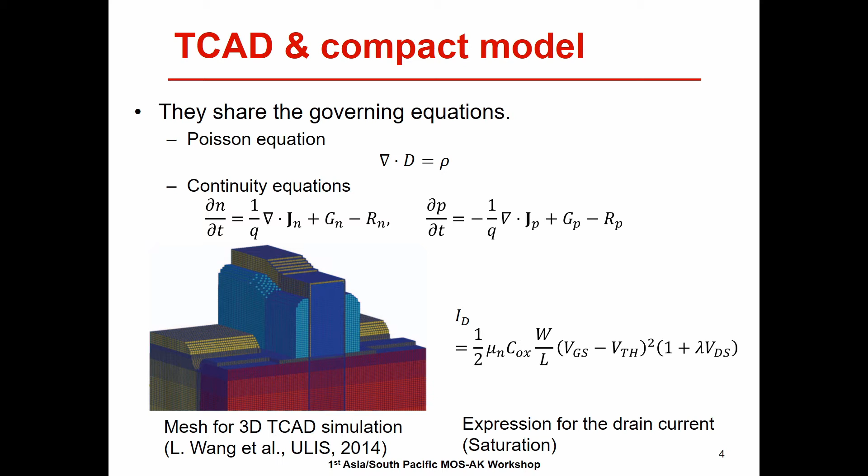Introduction. As we know, the TCAD simulation and the compact model share the governing equations. Those governing equations include the Poisson equation for the electrostatic potential and the continuity equations for the electron and hole densities. In the TCAD simulation, we introduce a mesh to describe the semiconductor device, and the discretized differential equations are solved at those mesh points. On the other hand, in the compact model, we build analytic or semi-analytic equations to describe the terminal characteristics.

It is my ultimate goal to provide a seamless transition from the TCAD simulation to compact models, at least in some sense. In the industry, there are many application engineers to calibrate their TCAD model devices to the fabricated ones. The calibration is very time consuming, and finally we have a well-calibrated TCAD model. However, the compact models are not much compatible with the TCAD simulation, and we need an additional step called parameter extraction to build a well-calibrated compact model. When we have a compact model similar to the TCAD, this step can be simplified.

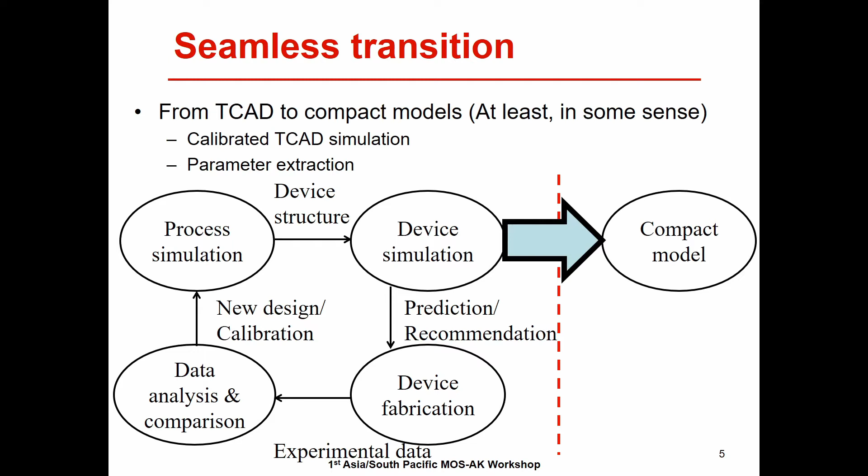Then, which are the major obstacles to achieve this goal? In my opinion, the most important one is the complicated geometry. In the planar MOSFET, we can consider the vertical direction as the only independent variable. The problem becomes one-dimensional and analytic approaches can be made. However, when multi-gate MOSFETs are concerned, it is very difficult to set a simple coordinate system. Another obstacle is an advanced physical model. In addition to the basic drift diffusion model, additional physical models are included in the TCAD simulation. Due to the limited model complexity, those advanced models are difficult to be included.

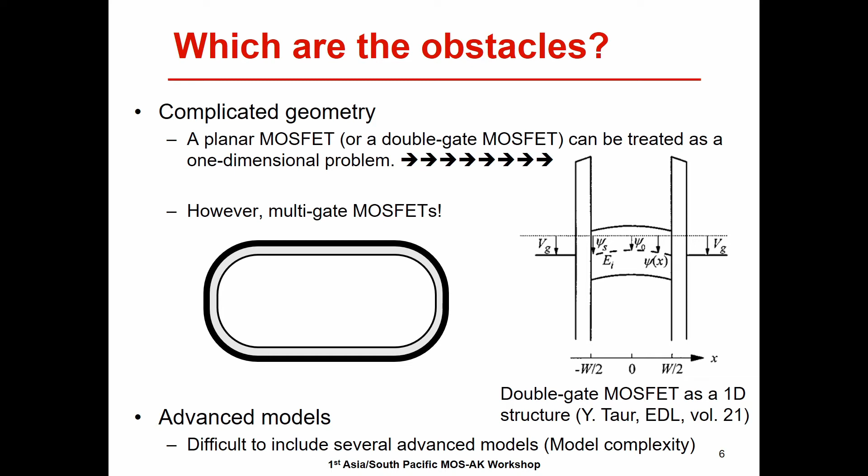Well, the parameter modeling is unavoidable in compact modeling. However, we can postpone the application of such modeling until the last stage of the model derivation. By taking this approach, we can keep the generality of derived models. We have recently published a few papers. In this presentation, I wanted to briefly review those works.

First, an arbitrary cross-section is considered. Previously, there were several compact models for various cross-sections of multi-gate MOSFETs. Now, we are expecting an era of nanosheet MOSFETs. Its cross-section is complicated. Moreover, the stacked nanosheets have different sizes. How can you model a complicated cross-section?

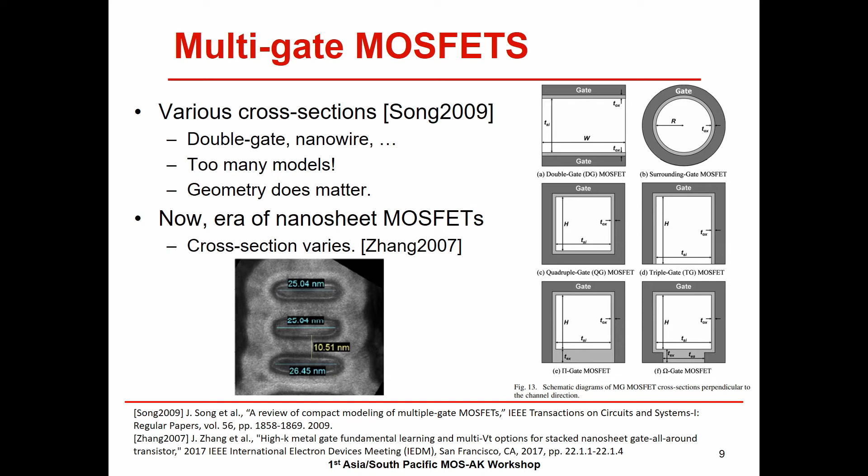One simple and appealing way is the linear combination. In this model, a cross-section is decomposed into several simpler shapes such as a circle and a rectangle. However, in this approach, the substrate sharing cannot be considered properly.

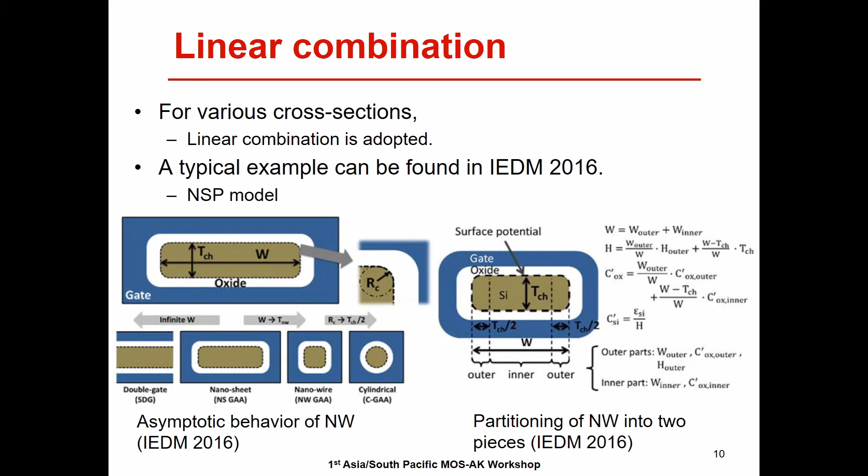Another approach is a so-called universal model. There are some different names, but the basic idea is the same. For a given cross-section, its area and perimeter are extracted. Then, by using these two parameters, we can make a compact model. It has been repeatedly shown that the model works quite well. One example is the BSIM-CMG, which is widely adopted.

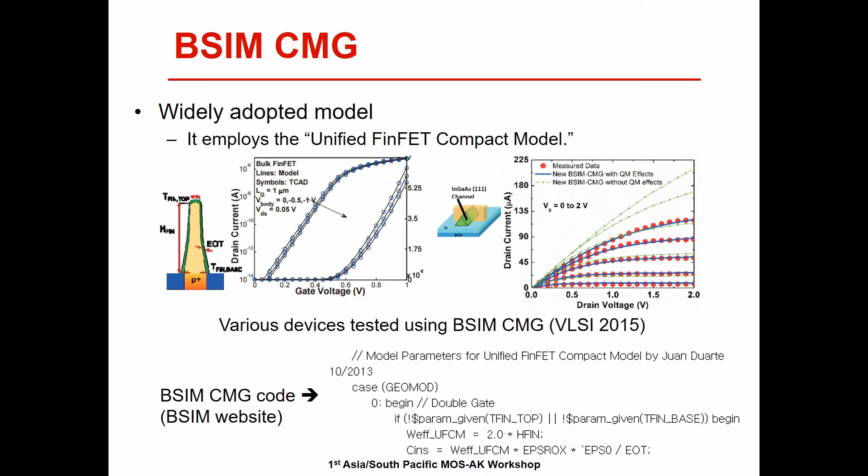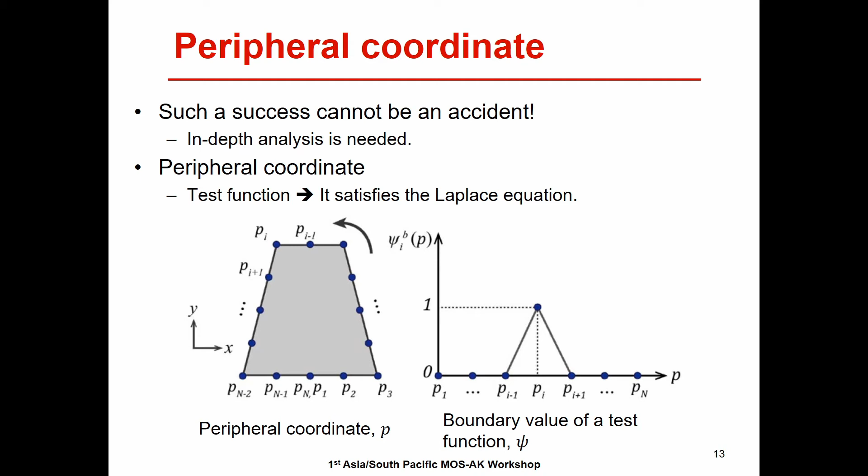Such a success of the universal model cannot be an accident. There must exist an underlying principle. For that purpose, we define a peripheral coordinate P, and a test function psi is also introduced. The test function is a solution of the Laplace equation with given boundary values. The test function for a certain boundary point represents the coupling between the boundary point and a substrate point.

By using several test functions, the substrate can be decomposed rigorously. It is noted that those decomposed pieces are overlapping. Therefore, different pieces are connected.

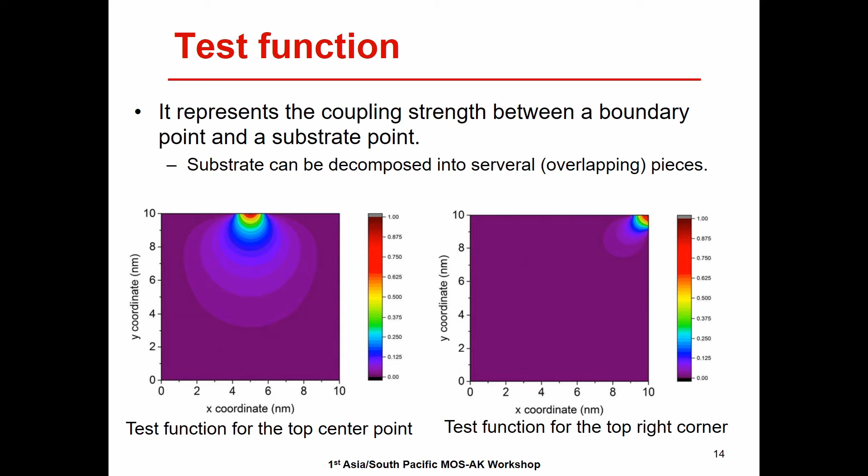We integrate the Poisson equation over the solution domain. The test function is used as a weighting factor. After manipulation, we can derive the Poisson equation written for a piece. It is stressed that no approximation is made up to now.

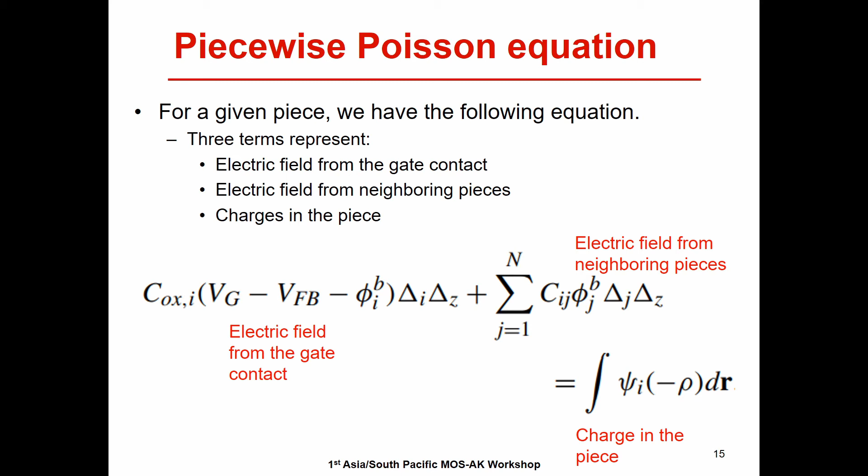It has three terms: the electric field from the gate contact, the electric field from neighboring pieces, and finally, electric charge in the piece. And the first two terms related with the electric fields can be expressed only with the surface potentials. Therefore, even for multi-gate MOSFETs with complicated cross-sections, the surface potential plays a critical role in the charge modeling. The charge in the piece is also modeled as a function of the surface potential.

We have applied the proposed partitioning scheme to a rectangular nanowire with a high doping density. In this case, the corner effect becomes significant. For each piece, we can calculate the equivalent oxide thickness and the equivalent substrate thickness. Moreover, the coupling capacitances between pieces can be readily calculated.

By using the substrate partitioning scheme, the corner effect can be accurately captured. Of course, in order to obtain this result, we must introduce several pieces. It is not very suitable to the compact modeling. However, it can be shown that the summation over all the pieces yields the equivalent double-gate MOSFET.

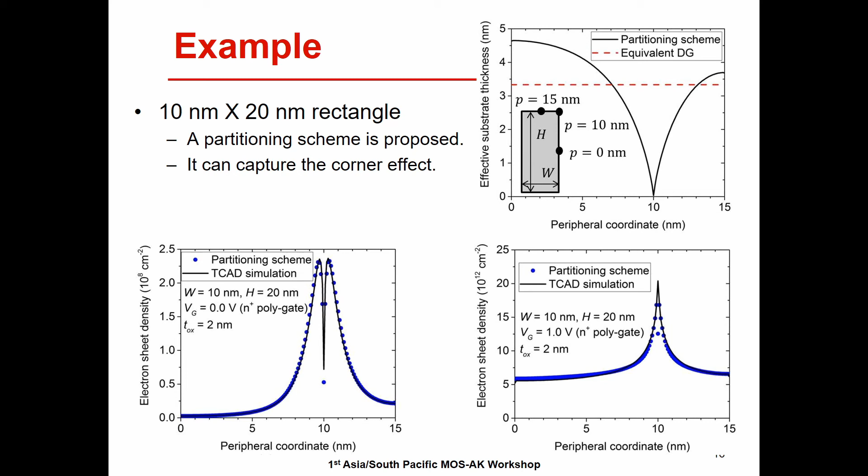The next example is the density gradient model. When the electron motion is restricted by a strong electric field or a material composition, the quantum confinement effect becomes significant. Especially in the nanosheet MOSFETs, the electrons and holes move along the channel direction only, and we must consider the quantum confinement effect. In the compact models, the effect is incorporated in various ways. In terms of physical accuracy, the subband calculation is desirable.

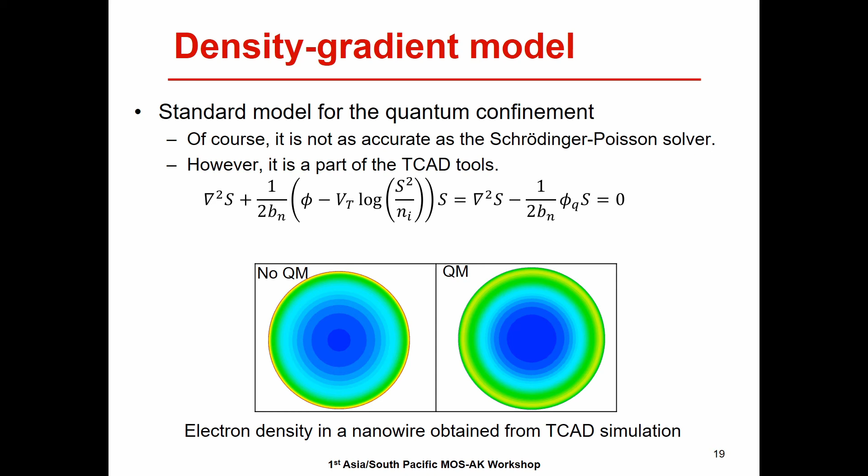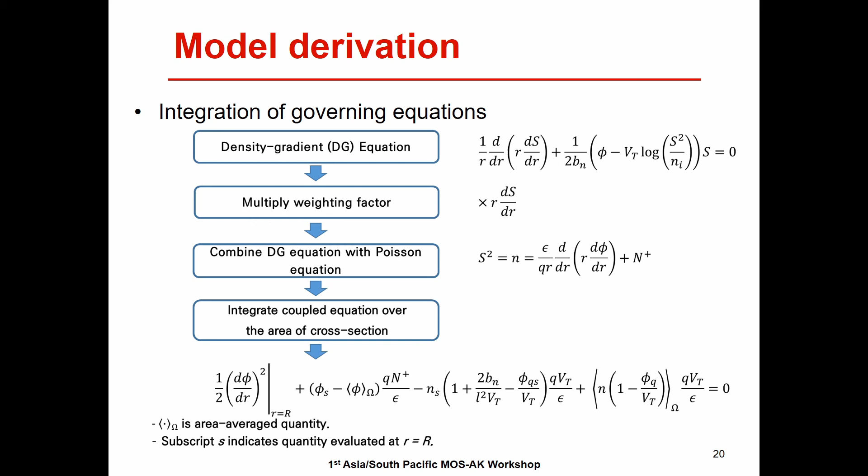This slide summarizes the model derivation procedure. We have two governing equations, the Poisson equation and the density gradient equation. They are integrated over the solution domain with a weighting factor. During the model derivation, no additional approximation is introduced. As a result, we have some unknown quantities, for example, phi sub omega in this slide. These unknown quantities are modeled following the TCAD simulation result.

Cylindrical GAA devices are considered. It is noted that the fitting parameters are dependent on the radius. With the well-calibrated parameters, the integrated electron density can be accurately calculated. Since the charge model itself is exact, a proper parameter modeling can yield excellent agreement with the TCAD simulation. More results about the capacitance and the terminal current will be reported elsewhere.

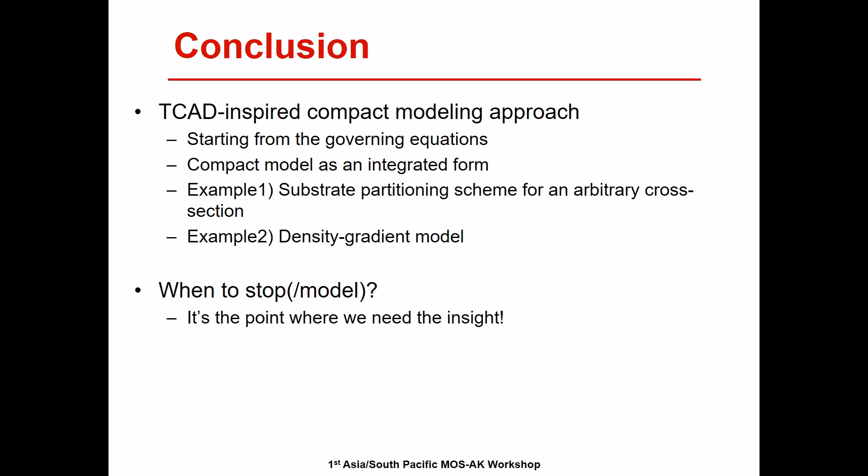Two examples, the substrate partitioning scheme for an arbitrary cross-section and the density gradient model, have been presented. The key is how to model the unknown parameters. It requires insight, and this is the point where an experienced researcher plays an important role.